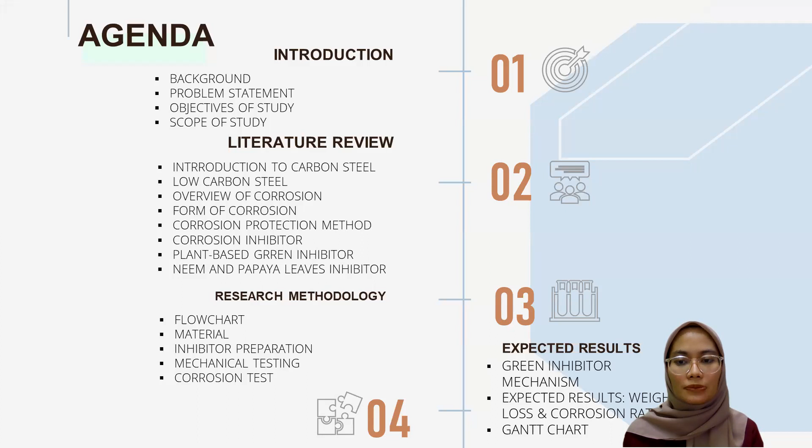For the background of the study, carbon steel typically has a carbon content of 1.5% or less, as well as trace amounts of manganese, silicon, phosphorus, and sulfur.

Corrosion is one of the problems that carbon steel faces as a result of poor protection. Corrosion is the wear and tear caused by chemical reaction, most notably oxidation. A corrosion inhibitor is a chemical compound which, when released into the environment, can slow the rate of metal corrosion. Green corrosion inhibitors are biodegradable corrosion inhibitors that are devoid of heavy metals, chemicals, and some hazardous substances.

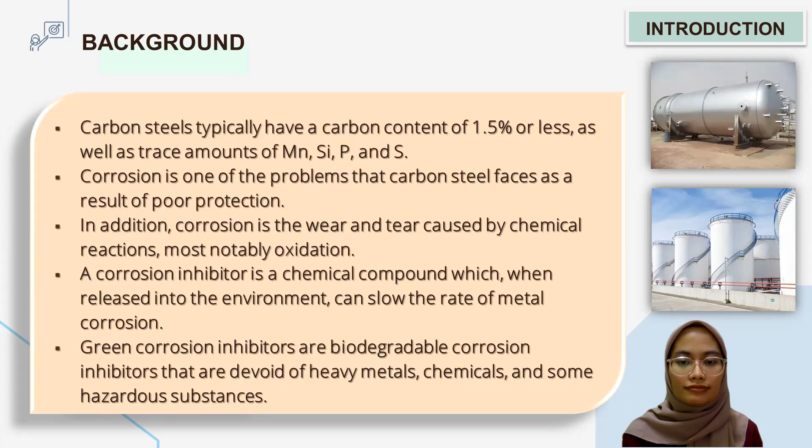For the problem statement of the study, the corrosion process is among the most damaging processes, producing massive economic damage in the automotive, marine, oil and gas, and aerospace sectors. Accordingly, the implementation of inhibitors for corrosion safely in marine and acidic environments provides good protection for metals.

Otherwise, the most common use is organic inhibitor. The use of inhibitor is a well-known strategy once metal corrosion has to be prevented, controlled, or reversed. The inhibitors are expensive, poisonous, and harmful. Furthermore, in this study we will use green inhibitor because they are the least expensive, biodegradable, ecologically acceptable, and renewable.

In the form of the circular economy, the valorization widens potential use in the manufacturing field other than waste to energy.

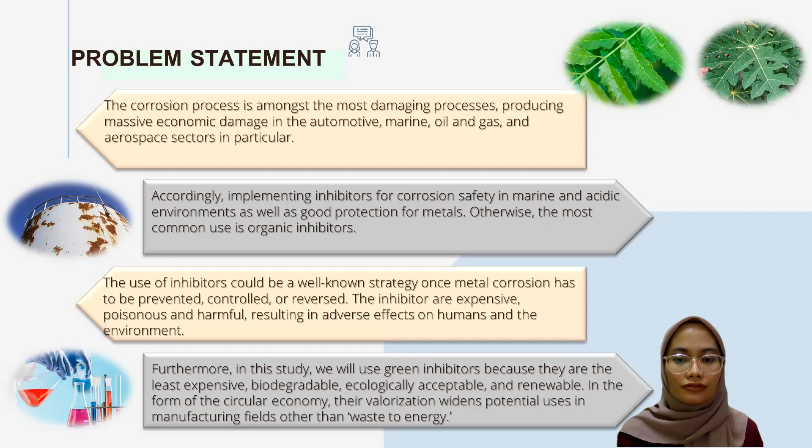For the objectives of this study, there are three: first, to investigate the influence of the immersion period on the inhibitor efficiency of the green inhibitors. Secondly, to evaluate the inhibitor efficiency of neem and papaya leaf as plant-based green inhibitor for low carbon steel in seawater and acidic medium. Thirdly, to compare the performance of the selected green inhibitor in preventing corrosion in low carbon steel.

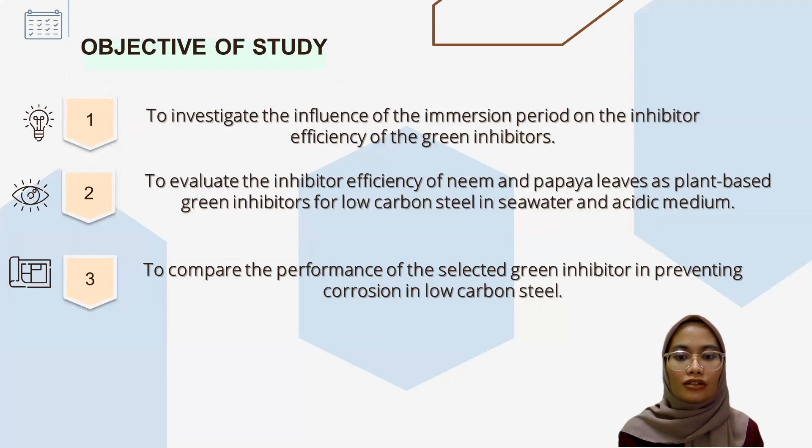Now I will explain the scope of the study. There are 9 scopes of the study. Firstly, to study the best formulation of the green inhibitor to perform anti-corrosion performance of the inhibitor on a low carbon steel substrate.

Secondly, selection of suitable plant to be extracted as organic inhibitor. Thirdly, preparation of plant-based green organic inhibitor for extraction. And the substrate will be cut into an EDM machine with thickness of 5 mm.

Fifth, hardness test and optical microscope to perform mechanical testing on the substrates. Next, perform the corrosion test on the base metal that was inhibited by the corrosion inhibitor, that is neem and papaya leaf, to study the corrosion behavior via immersion test in 0.5 M HCl.

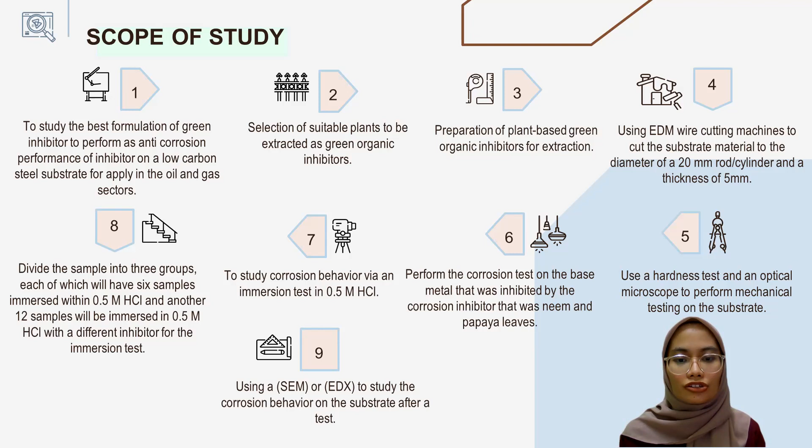The samples will be divided into 3 groups, of which 6 samples are immersed in 0.5 M HCl and another 12 samples will be immersed in 0.5 M HCl with different inhibitors. Lastly, using SEM or EDX to study the corrosion behavior on the substrate after the test.

For carbon steel, there are 3 types: high carbon steel, medium carbon steel, and low carbon steel. There are various properties of carbon steel, and the highest carbon content is in high carbon steel.

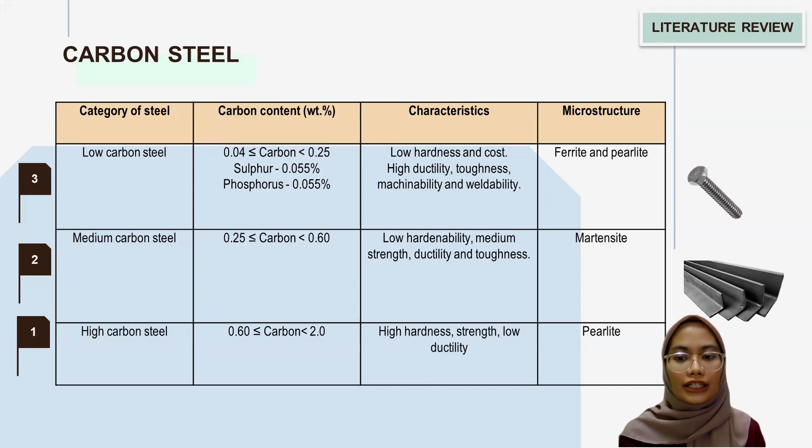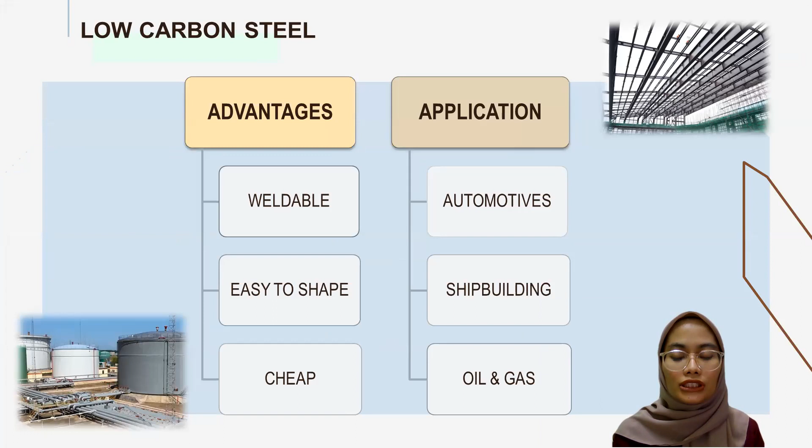For low carbon steel, the advantage is weldability. Low carbon steel is typically the most readily welded, easy to shape or cut, and cheap. The low cost of welding is effective for low carbon steel. For applications, it is used in automotive, shipbuilding, oil and gas, such as pressure vessels and tanks.

Corrosion is also the process of degradation of metal properties through an unwanted chemical or electrochemical attack by its environment. The factors of corrosion are relative humidity, temperature, and air pollution.

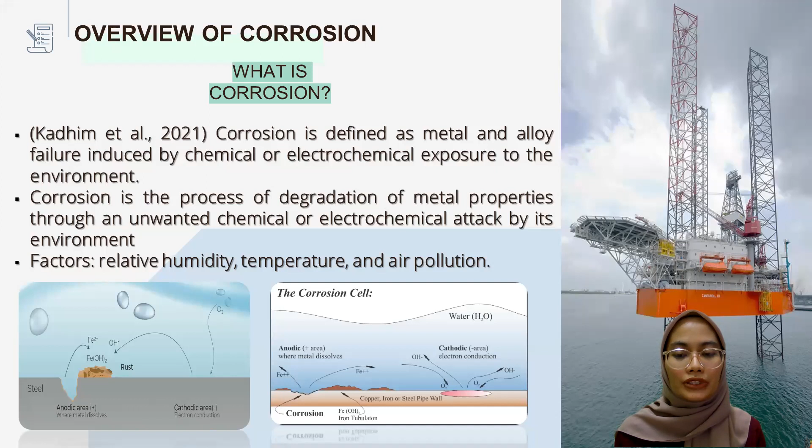There are two forms of corrosion: uniform and localized corrosion. Uniform corrosion is the uniform corrosion. Localized corrosion includes galvanic corrosion, atmospheric corrosion, pitting corrosion, crevice corrosion, erosion corrosion, and others.

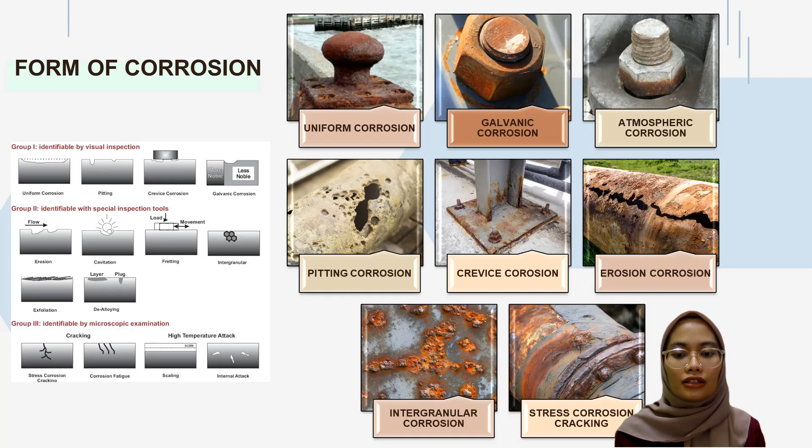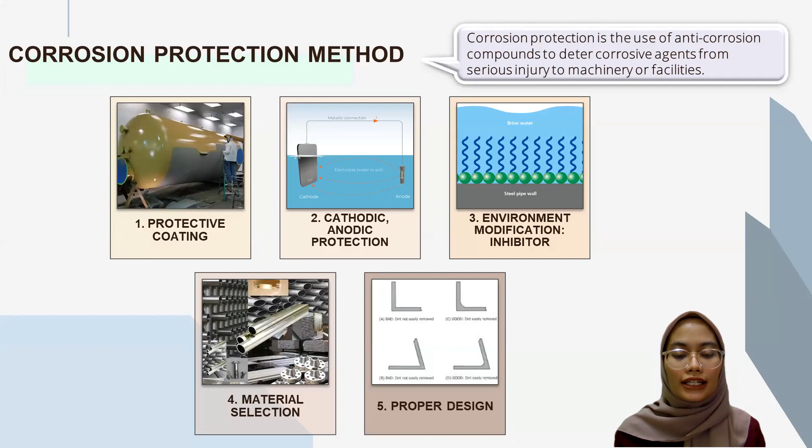For the corrosion protection method, actually we have 5: protective coating, cathodic and anodic protection, environment modification which is inhibitor, material selection, and proper design. We need to select the right material selection and proper design.

Next, I will compare the two inhibitors. Corrosion inhibitor is a chemical substance that, when applied in a small amount to a corroding environment, reduces or delays metal corrosion, preventing it. There are inorganic inhibitors and organic inhibitors. Organic inhibitor is eco-friendly and non-toxic, cheap and readily available, and more environmentally friendly compared to inorganic inhibitor.

For plant-based green inhibitor, plant extracts and organic species have therefore become vital as environmentally acceptable, quickly available on the market, and sustainably sourced for a variety of application as inhibitors. For example, aloe vera, turmeric, orange, and banana.

The term green inhibitor or eco-friendly inhibitor alludes to biocompatible substances found in nature, and they are non-toxic, economic, and readily available.

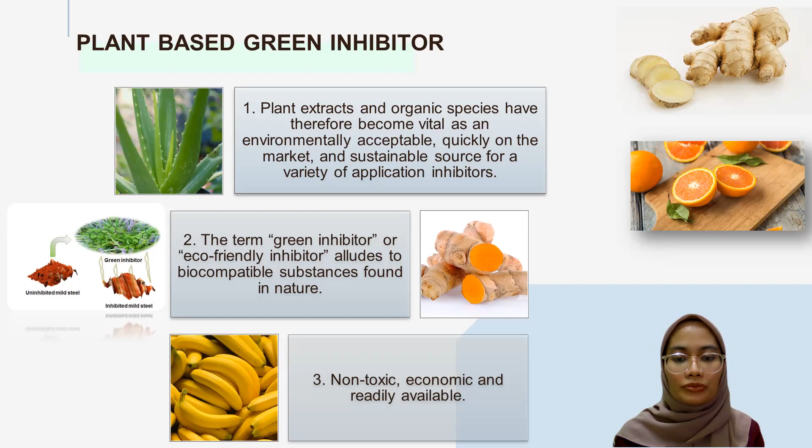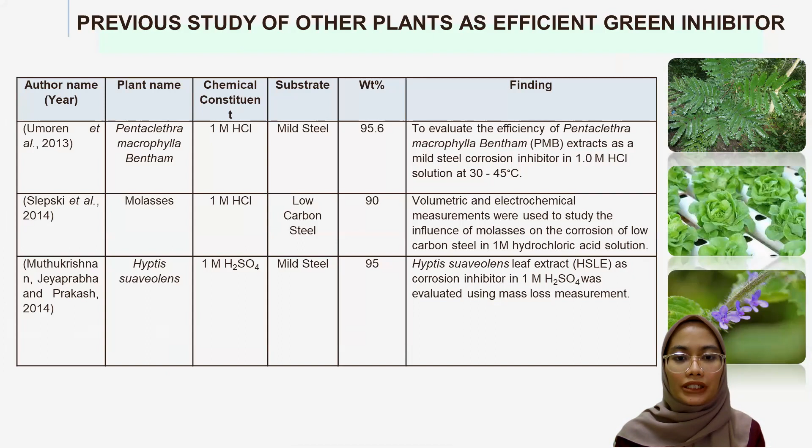For my research, previous studies on other plants used many substrates, such as mild steel and low carbon steel, with chemical concentrations of hydrochloric acid and others. This also includes previous studies I found on Carica papaya, Musa paradisiaca, and Ligularia fischeri.

Next, I will use neem leaf inhibitor as my study. The scientific name of neem is Azadirachta indica, part of the Meliaceae family. Azadirachta indica contains complex constituents such as nimbin, nimbidin, nimbolide, and limonoids, and these components play a significant role in disease control.

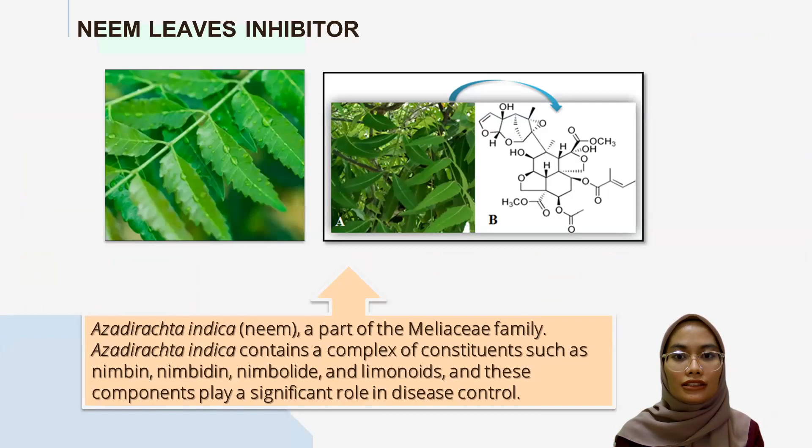For Azadirachta, this is the research where the substrates used are carbon steel, mild steel, zinc, and copper, which were immersed in hydrochloric acid chloride medium.

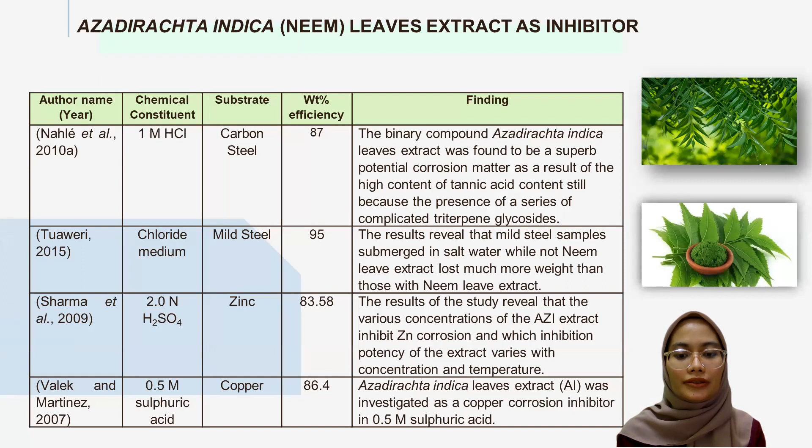Okay, this also I will use in this study. There is papaya leaf inhibitor. The scientific name is Carica papaya leaf, a member of the Caricaceae family.

Papaya leaf extract made from dry and fresh ground leaf contains a variety of compounds, including flavonoids and other plant phenols.

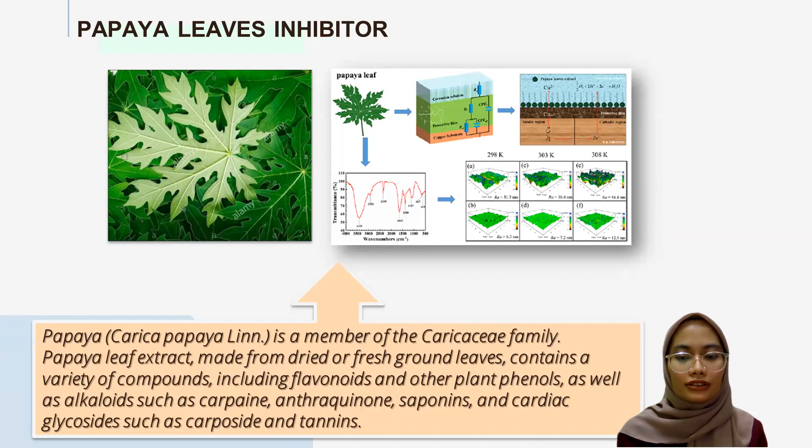This is the research for the papaya leaf study that uses copper, mild steel, and chemical concentrates such as hydrochloric acid and sodium hydroxide.

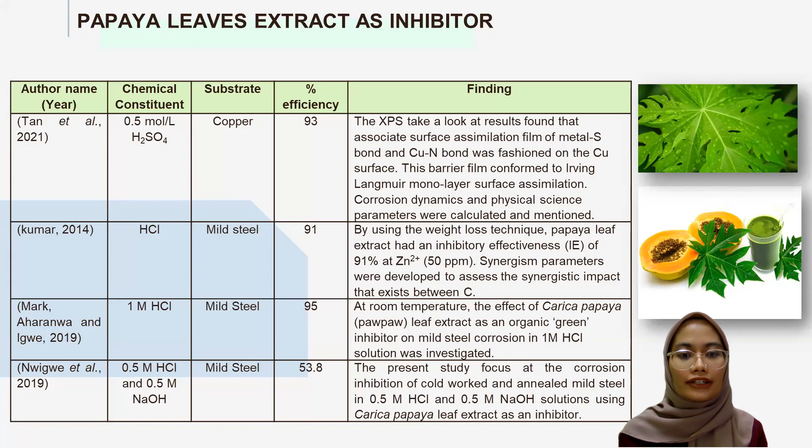So I will explain the flowchart of this study. Firstly, we prepare the specimen, which is low carbon steel with diameter 20 mm and thickness 5 mm. Next, the preparation of corrosion medium, which is neem leaf solution and papaya leaf solution, goes to the extraction process.

Then oven process, FTIR, immersion test, and for the low carbon steel, we use mechanical testing for the substrate, micro hardness analysis, and microstructure analysis. After the process, we submit the thesis.

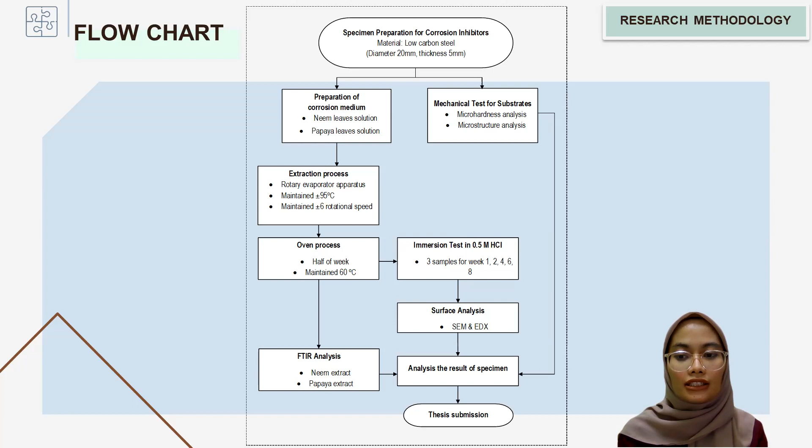For the material sample, we use low carbon steel with substrate dimensions of 20 mm and 5 mm. The material preparation is according to ASTM G1.

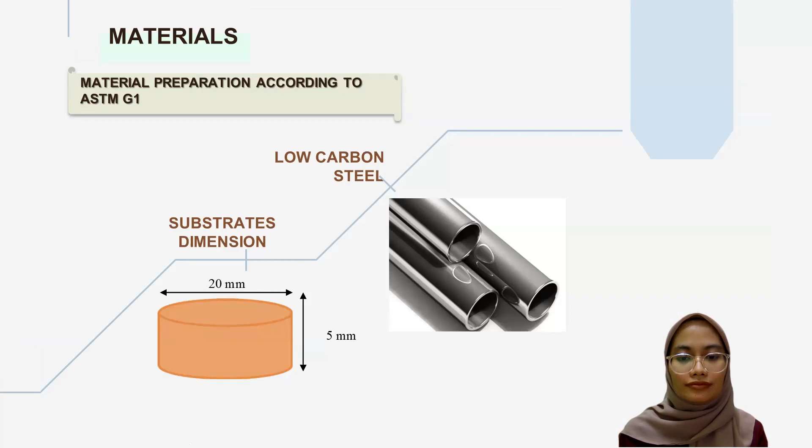For the inhibitor preparation of neem leaf extract, firstly, tear the neem leaf into small pieces and then dry it under environmental conditions. Then boil it with distilled water, insert the extract into the rotary evaporator, evaporate the extract without water composition, then insert it into the oven, and finally obtain the liquid form.

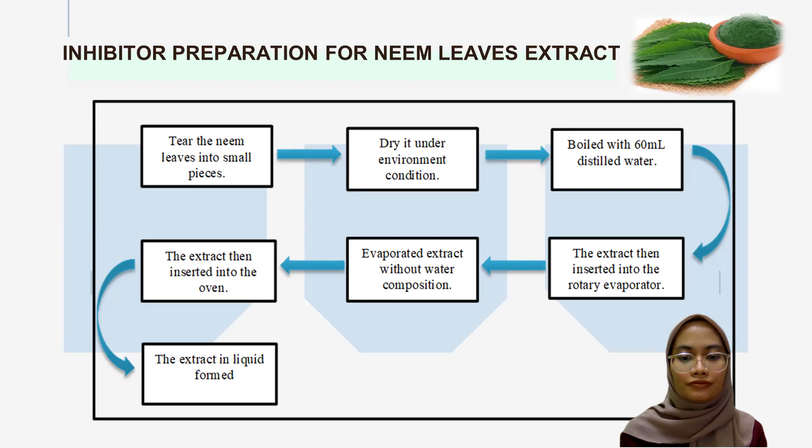For the inhibitor preparation of papaya leaf, it's the same process as the neem leaf. Firstly, tear the papaya leaf into small pieces, dry it under environmental conditions, then the leaf will be ground into a powder. The extract is then inserted into the rotary evaporator, and lastly obtained in liquid form.

For the mechanical testing of the substrates, which is low carbon steel, we use an optical microscope, grinding and polishing machine, and hardness testing machine to examine the microstructure and hardness of the low carbon steel.

For the material characterization, we also use SEM and EDX to analyze in detail the microstructure and composition of the immersed substrate.

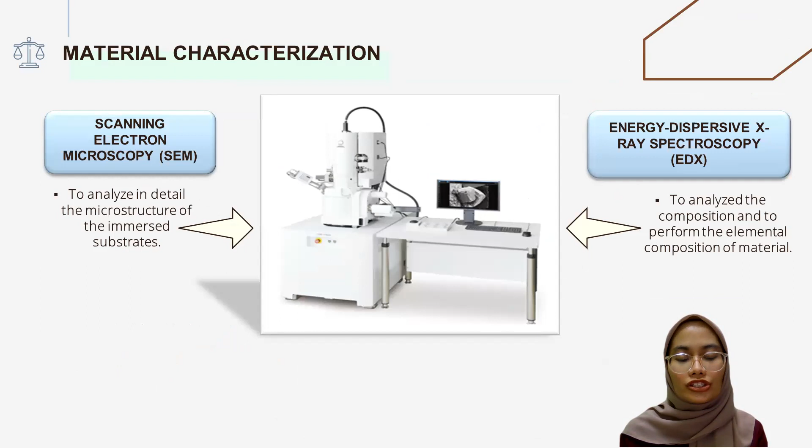For the corrosion test, we divide it into 4 tests. Corrosion testing is used to determine the material's resistance to environmental conditions such as temperature, humidity, and salt water.

For the immersion test, immersion testing is the most often used technique for monitoring metal corrosion in aqueous solution, which is hydrochloric acid, and the process of corrosion degradation is caused by the length of time exposed to the corrosive atmosphere. We can see in the picture there is the inhibited medium, low carbon steel specimen, string, and the container.

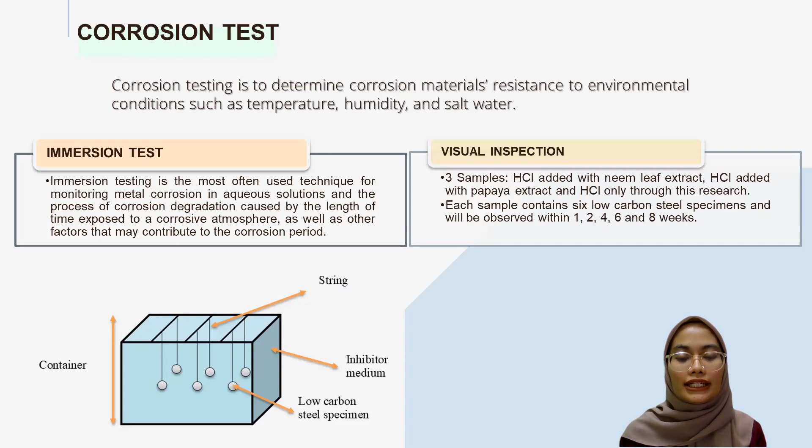Next, for visual inspection, we use 3 samples: hydrochloric acid with neem leaf extract, hydrochloric acid with papaya extract, and lastly hydrochloric acid only. Each sample contains 6 low carbon steel specimens which will be observed within 1, 2, 4, 6, and 8 weeks, or 2 months.

Next, for the corrosion test weight loss measurement, the weight loss measurement will be carried out at various concentrations by immersing substrates in HCl solution. The formula is W0 represents weight loss without the inhibitor, and Wi denotes weight loss with the inhibitor.

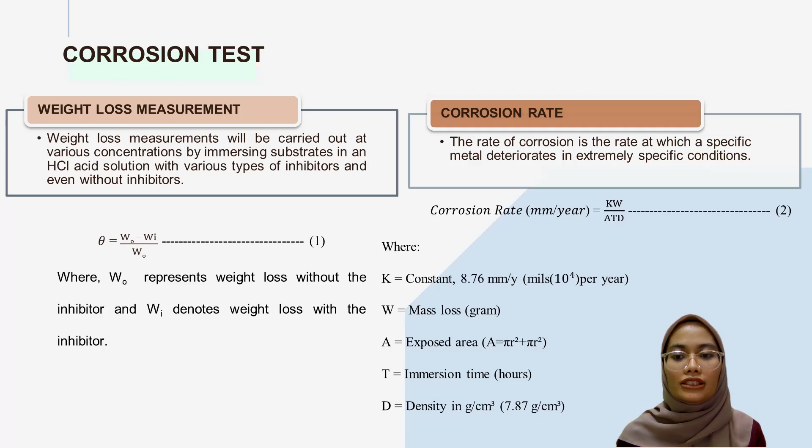The corrosion rate is the rate at which a specific metal deteriorates under specific conditions.

After doing all these things, the expected result of the study is the green inhibitor mechanism. The corrosion protection diagram will be performed on the basis of the testing findings. Furthermore, this experiment will establish adsorption on the low carbon steel substrate surface.

Next, the expected result of weight loss and corrosion rate. Weight loss will be observed to compute the loss of weight in the specimen pre and post immersion, whether the weight loss could increase or decrease with the 3 solutions: neem, papaya, and 0.5 mol HCl.

The corrosion rate is the rate at which any metal degrades in a specific acidic environment. We can see this in the graph of weight loss measurement and corrosion rate.

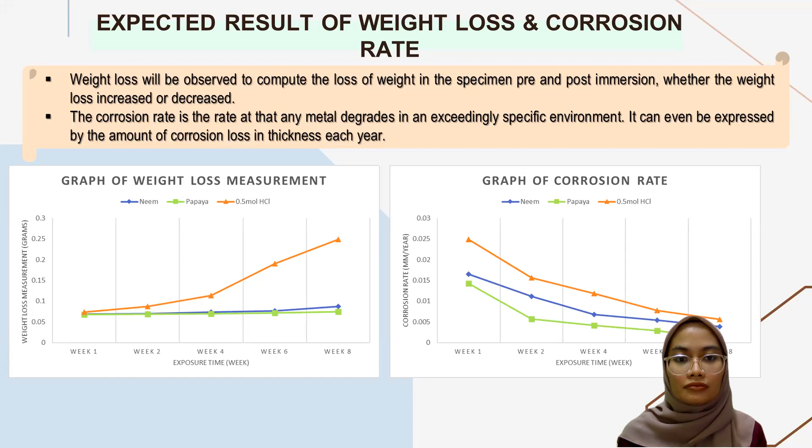This is the Gantt chart for PSM1 within week 1 until week 16, and the activities from supervisor selection until the preparation and presentation of PSM1 for the smoothness and completeness of the thesis.